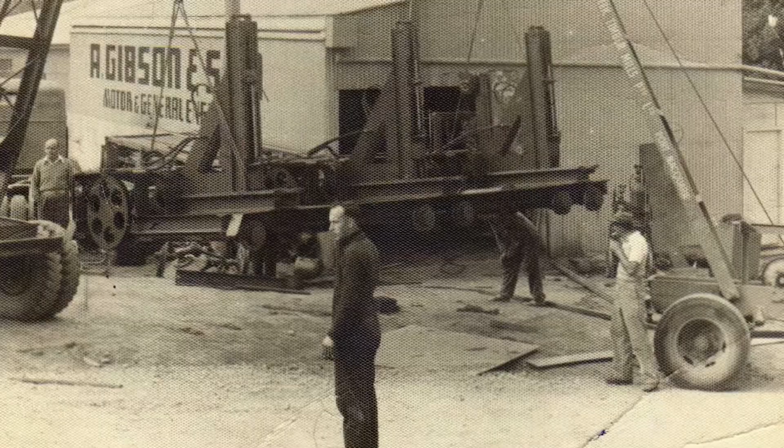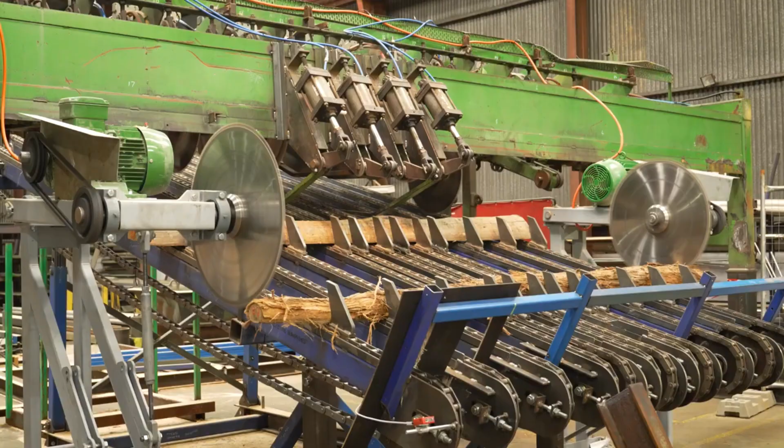Gibson's originated here in Kendal in the late 1800s. It's a fifth generation family-owned business. I'm Curtis Gibson, CEO of Gibson's at the moment, and I'm the fifth generation into the organisation. To this day, there's still two generations active in the business.

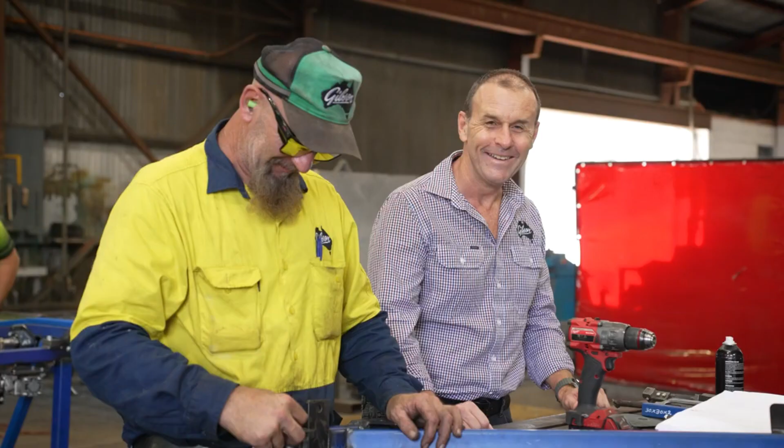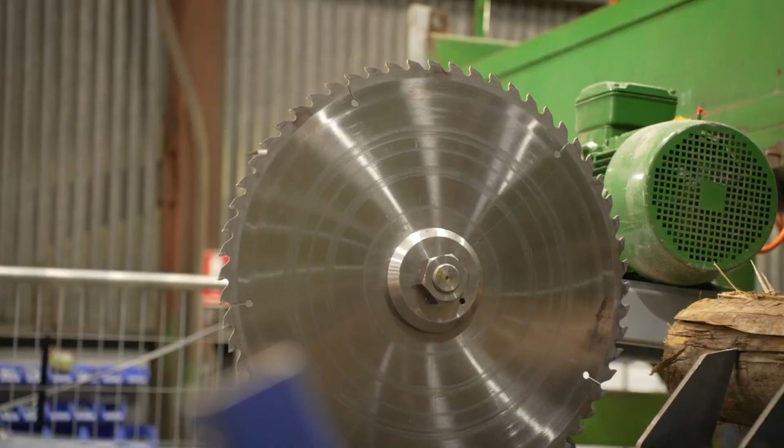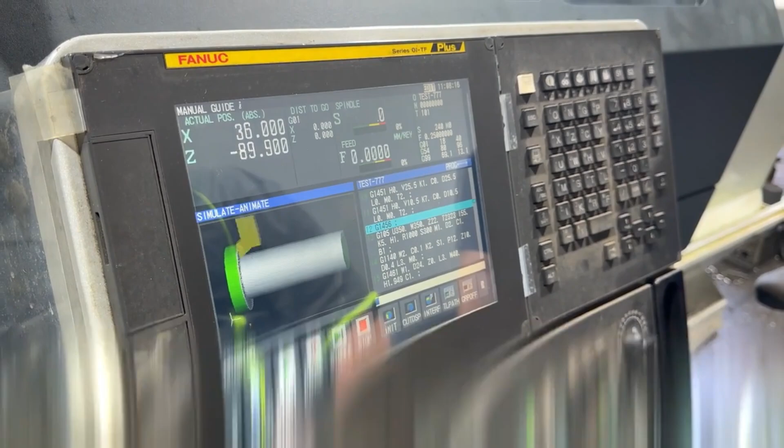There's three of my uncles still here in the organisation. Gibson's was founded in the late 1800s on the back of the Australian timber industry. This is a little bit of a hub here. Engineering services evolved over time into other industries, but Gibson specialise in custom bespoke heavy industrial equipment with a heavy focus around industrial automation. In recent years, we've been able to diversify with our capabilities and skill sets into other markets, materials handling, robotics, and implementation of new technologies.

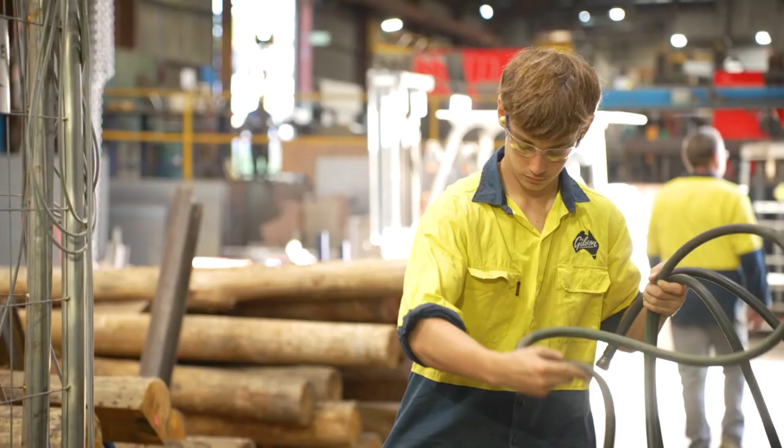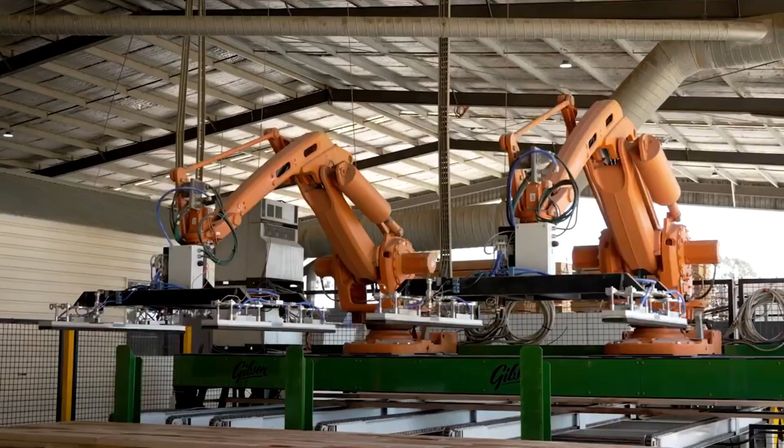Within our team, our strength lies around our people and their skill set. We're a proud member of the Kendal community. We employ roughly 40 people out of the regional New South Wales area. We pride ourselves on engaging young kids into our company through apprenticeships, traineeships, anything from general trades through to engineering. Our customer network ranges right across Australia through to New Zealand and some of the Oceania islands, Fiji, Papua New Guinea and the like.

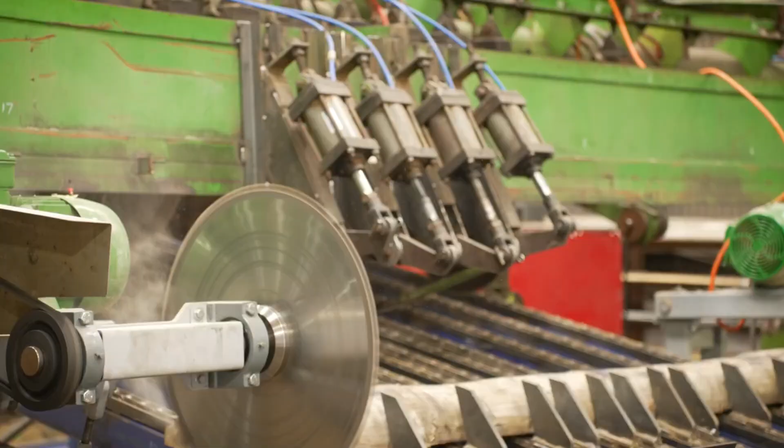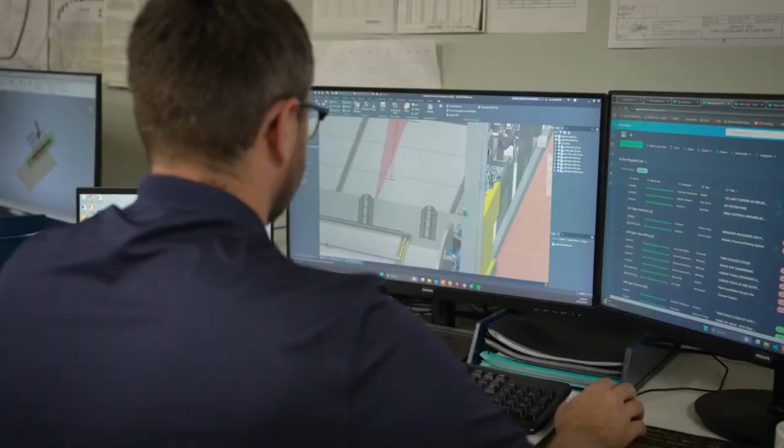Gibson machinery is built fit for purpose. Generally, the Australian industry can be rough and tough, so our gear has to stand the test of time. We pride ourselves on our capabilities and our innovation. We use 3D design software, AutoCAD and Inventor. We also use 3D point cloud systems so we can get accurate on-site measurements to do simulations and proof of concepts with our clients so that we can get pen to paper quick to pretty much create and customise bespoke solutions that they can see from start to finish.

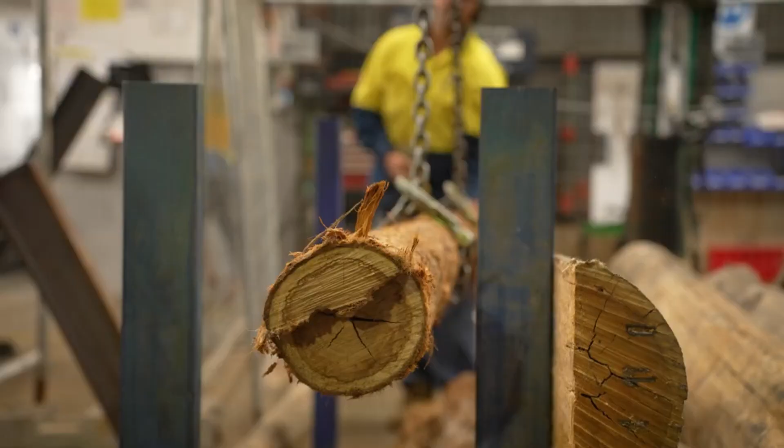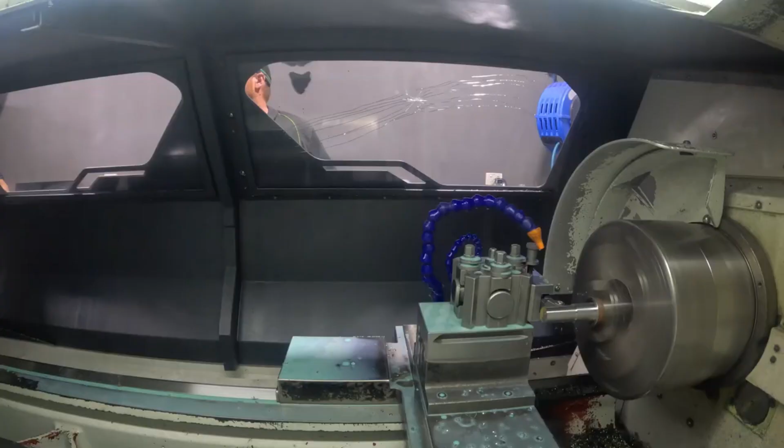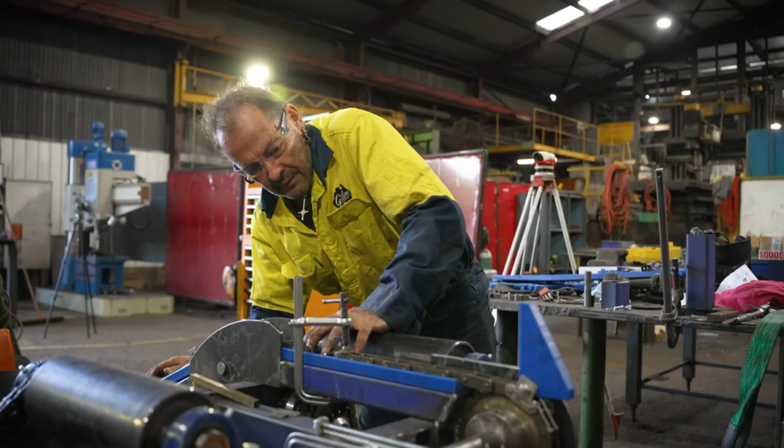Gibson's is here today because of its people and culture. I see the Gibson business being a market leader in advanced automation in the manufacturing environment. I'm very fortunate to be in a position where I've been able to come in as a fifth generation into the family business. It's humbling to be around people with the skill sets and care that they have for the business. It's had a good foundation and I really look forward to seeing what we can do as a business unit going forward.